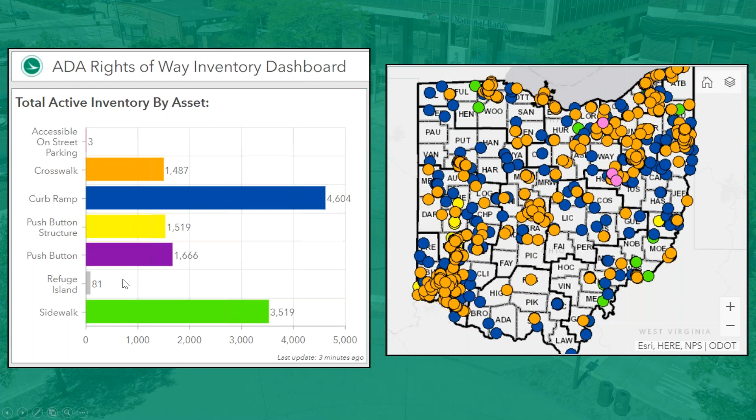The purpose of this webinar is to cover all of those ideas that were implemented in the July update just about a month ago. So the first big update was that we created a single online location for all ODOT ADA guidance, a new website to house references, standards, guidance, and training.

ODOT has ADA guidance spread out through many different manuals, guides, and standard drawings. This effort collects all of those into one page and provides links to where all ODOT guidance on each ADA feature can be found.

If you go to Google and search ODOT ADA, it should be the first page listed in the results. The address is also listed on this slide. The web page contains pull-down tabs for every ADA design feature, including curb ramps. Each of these pull-down tabs contain numerous links to where you can find all ODOT's guidance and standards related to that ADA design feature.

On the right side of the page is a link to a document called ADA Update, What Changed in July, which provides an executive summary of all the recent updates. This webinar will cover each of the 8 points listed in that document, with the first being the new ADA resource website.

The second update involved making some minor changes to the Office of Traffic Operations Signal Design Reference Packet, or SDRP. We added a link to ODOT's ADA Design Resource webpage to page 2, the reference page. We also added ADA checks to the detailed design and review submission stages checklist. And we updated the ADA push button and structure diagram and design notes to remind designers of ADA requirements.

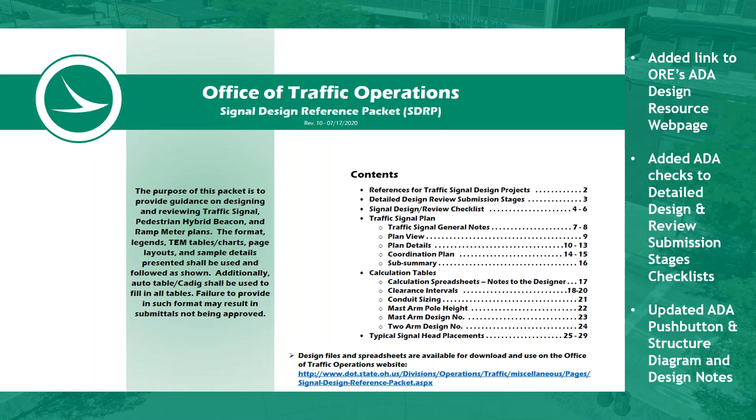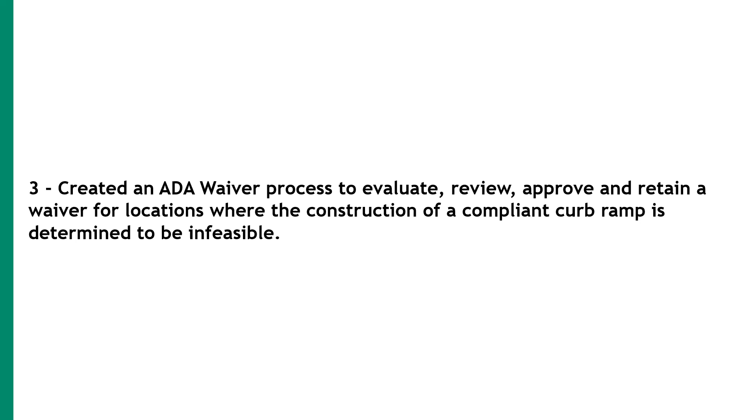Number 3, and maybe the most substantial update, is that we created an ADA waiver process to evaluate, review, approve, and retain a waiver for locations where the construction of an ADA compliant curb ramp is determined to be infeasible. We've broken this update out into 6 subparts, with the first being that we updated the guidance in Location and Design Volume 1, Section 300 to include information on when a waiver is allowed.

Please see L&D Volume 1, Section 306.1.1, Exceptions to PROWAG, for more information. It goes through the next few bullet points. It's not always practicable to fully meet ADA dimensional requirements, which is acknowledged by PROWAG. Even if a curb ramp is eligible for a waiver, it still needs to be constructed to meet ADA requirements to the maximum extent possible. So if one design element can't meet ADA standards, the waiver doesn't allow the designer to forego meeting all the other design requirements.

Disproportionate cost to provide an accessible path of travel can be a factor in a decision to deviate from ADA requirements. Disproportionate cost is defined to be the additional cost of alterations to provide an accessible path of travel to the altered area, disproportionate when it exceeds 20% of the cost of the alteration to the primary function area. That is taken directly from PROWAG and was added to L&D 1, Section 306.1.1.

In cases where it is not practicable to meet all ADA dimensional requirements, the constraints are required to be documented in an ADA waiver form. The district design engineer is responsible for the review and approval or denial of all ADA waivers.

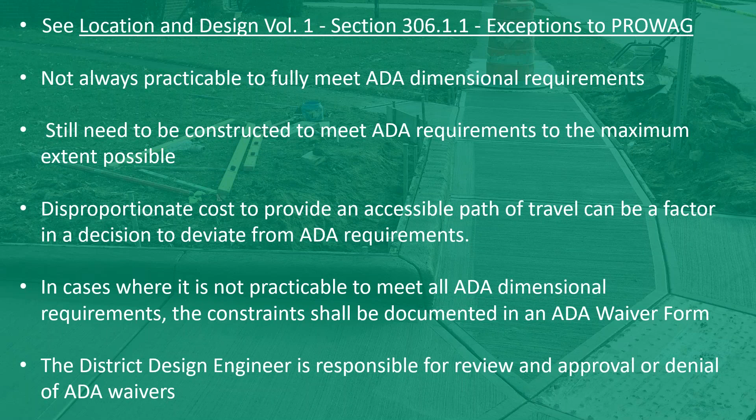A project's scope, purpose and need should be a consideration when evaluating an ADA waiver. The scope of the project can be an important consideration in determining if meeting ADA requirements is practicable. For example, resurfacing projects are considered alteration projects that require the updating of pedestrian curb ramps, and if the scope of a resurfacing project does not require the purchase of additional right-of-way, it is not practicable to purchase right-of-way.

The project should make as many ramps as fully compliant to ADA requirements as possible without the purchase of right-of-way. Those ramps not meeting the ADA requirements must have an approved ADA waiver form completed and signed by the district design engineer.

Future projects at a location with a waiver should determine whether the curb ramp could be made compliant based on the scope of the project, while recognizing that there are some locations where it may never be possible to make the ramps fully compliant. A waiver is a last resort. It's a way to document ODOT's design and construction decisions, not a loophole to provide substandard curb ramp designs.

We created a curb ramp evaluation form to assist planning, design, and construction personnel in evaluating ADA compliance of curb ramps. Here's a screenshot of what the form looks like, and it can be found on the ADA Design Resource webpage under the curb ramp pull down.

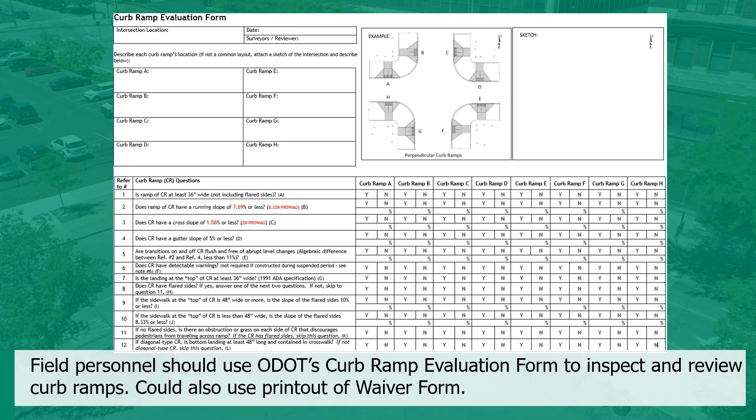Field personnel can use ODOT's curb ramp evaluation form to help inspect and review curb ramps. You could also use a printout of the waiver form to help with inspection and review.

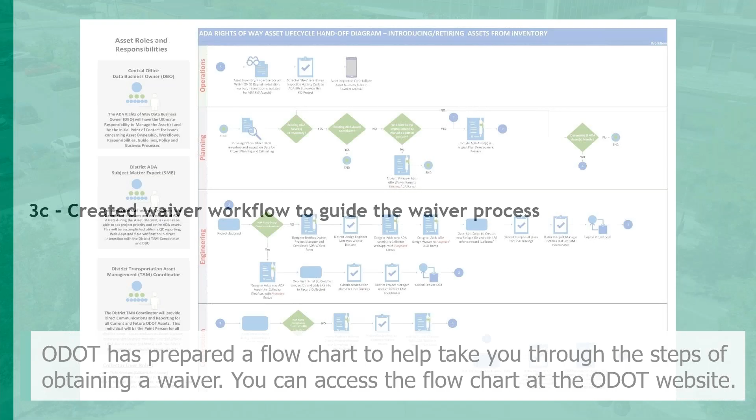Also part of the waiver update, we created a waiver workflow. The workflow provides a step-by-step guide to all users and covers the entire waiver process. It can be found on the ADA Design Resource page in the right-hand column and is titled ADA Lifecycle Handoffs with Waiver.

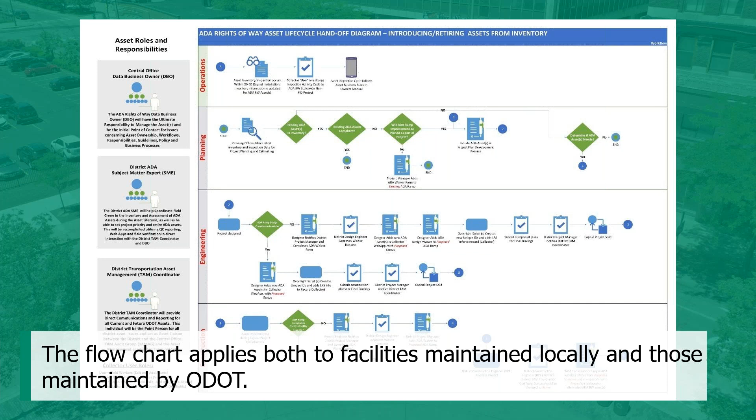The flowchart applies both to facilities maintained locally and those maintained by ODOT. It details the steps required to process an ADA waiver, whether the need is identified during planning, design, or construction.

At any point in the design process, when the designer becomes aware that it is not feasible to make a curb ramp compliant, they should notify the ODOT project manager to start the waiver process. Each ramp that does not meet ADA requirements should have an approved ADA waiver form completed and signed by the district design engineer.

If another project is carried out at the same location, the designer should determine whether the scope of the project will allow making the ramp compliant. ODOT recognizes that it may never be possible to make ramps fully compliant in some locations.

So here's the process for obtaining a waiver while in the design phase. The designer notifies the ODOT project manager. The ODOT project manager completes the ADA waiver form. The district design engineer reviews and approves the waiver request and notifies the ODOT project manager. The ODOT project manager adds the new ADA asset into the collector app with the status of proposed.

The project manager adds the ADA design waiver to the proposed ramp, and then the overnight script creates a new unique ID for the ramp and adds LRS info to the record in the collector app, and then the designer submits and completes final plans for the final tracings.

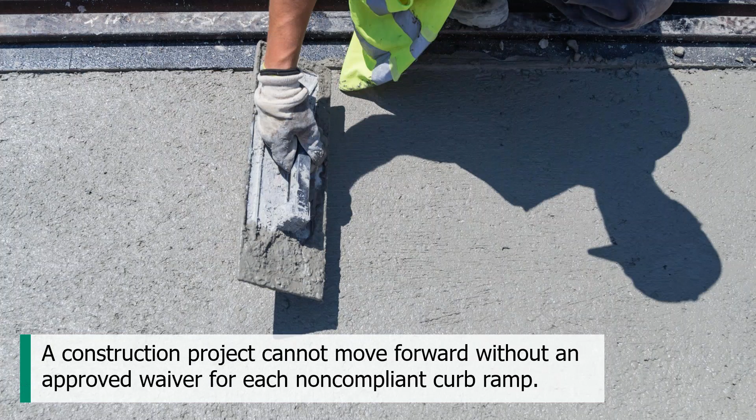A construction project cannot move forward without an approved waiver for each non-compliant curb ramp. Waivers approved during the design phase should be listed in the general notes and on the title sheet of the plans.

So here's the process for obtaining a waiver during the construction phase. The contractor notifies the ODOT project engineer of a non-compliant curb ramp. The ODOT project engineer notifies the district project manager who completes the ADA waiver form. The district design engineer reviews and approves the waiver request. The district project manager adds the waiver to the ramp in the collector app.

When the project is completed, the district TAM coordinator changes the ramp's asset status from proposed to active. And finally, the district TAM coordinator changes the status of any assets replaced or eliminated to retired.

Again, this is just a sample workflow, and the districts can assign the different responsibilities as they see fit outside of the waiver approval, which again can only be made by the design engineer.

The fourth subpart of the waiver process update is the creation of the waiver form itself, which is set up in FormStack. Currently access is restricted to only the district design engineers, but it can be opened up to a few other users per district, though it's not intended to be something everyone has access to the electronic version of anyway.

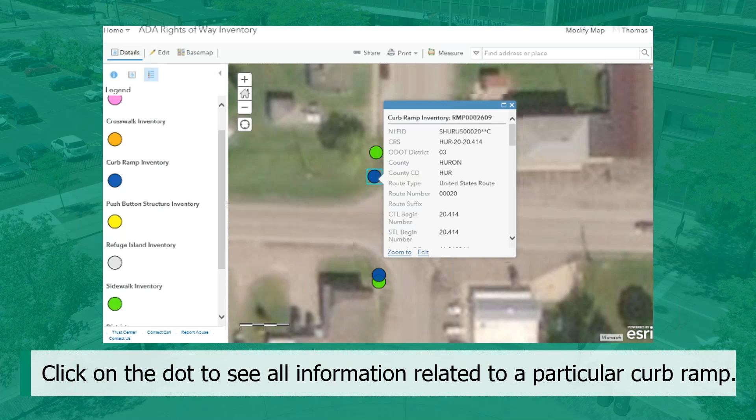The sixth and last subpart of the waiver process update included updating the construction plan title sheet to include a note on whether or not there are any curb ramps that have waivers within the project. If so, a general note should be added to describe the curb ramp and waiver in more detail.

In L&D Volume 3, Section 1302.15, this section shows the formatting that should be used when noting whether or not there are any ADA design waivers on the project, and includes references on where the updated sample title sheet and sample plan note can be found.

On sample plan sheet 1302.1, you can see here highlighted in red what it looks like just below the design designation and design exception information. As shown on the previous slide, it should just say required or not required, and the general notes can add more detail.

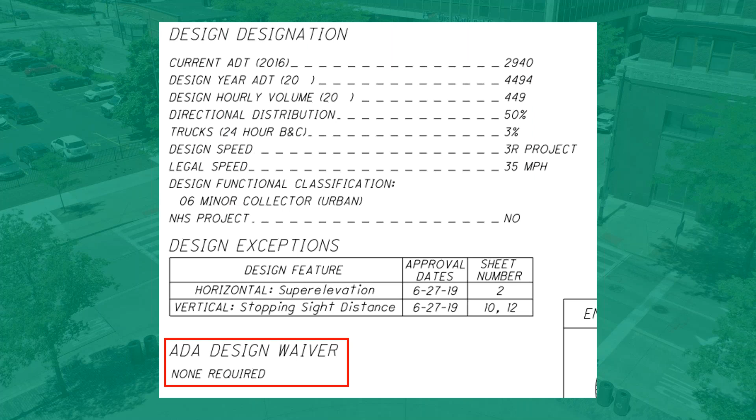In L&D Volume 1, Appendix B, Roadway Sample Plan Notes, you can find Sample Plan Note R128, ADA Waiver, which lists the ramp ID number, the approval date of the waiver, and which sheets the ramps are located on.

Update number 4 included updating Section 300 of L&D Volume 1 to provide additional design guidance for optimum curb ramp selection. Curb ramps were divided into tiers with preferences listed.

Curb ramps come in 5 basic types. Tier 1 is considered to be the most desirable, and Tier 4 the least desirable, with the blended transition as an additional design option.

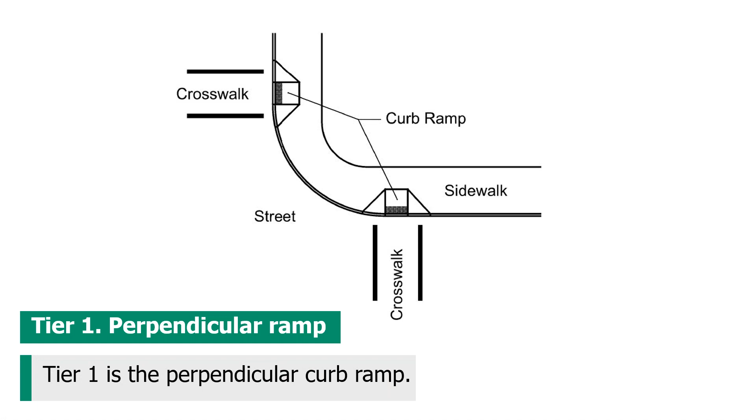Tier 1 is the perpendicular curb ramp shown here. This is generally the best design for pedestrians, provided that a landing of at least 4 foot wide is available for each approach.

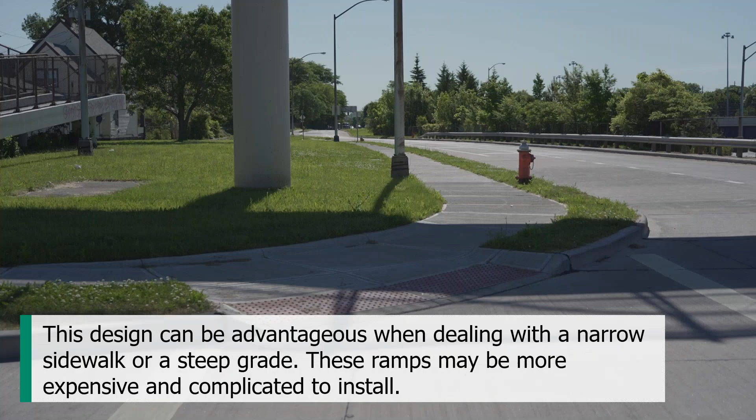Tier 2 is a combined ramp, which is basically 2 ramps in one. This design can be advantageous when dealing with a narrow sidewalk or steep grade, but these may be more expensive and complicated to install.

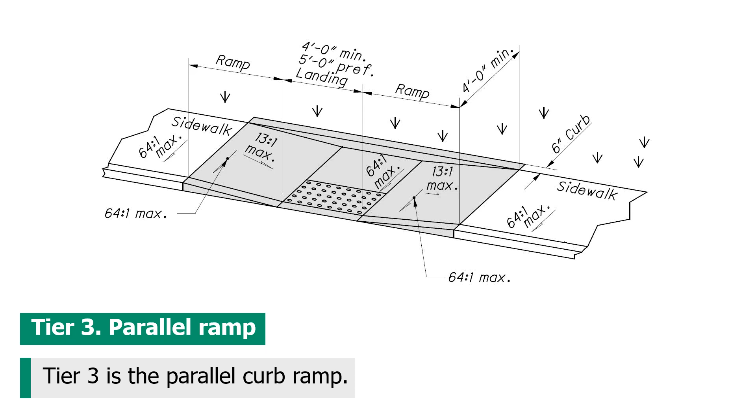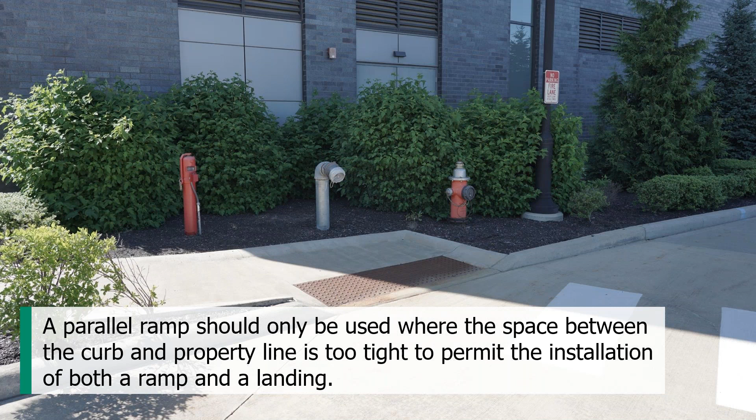Tier 3 is the parallel curb ramp. A parallel ramp should only be used where the space between the curb and property line is too tight to permit the installation of both a ramp and a landing. A parallel ramp may be necessary on steep terrain or in locations with high curbs.

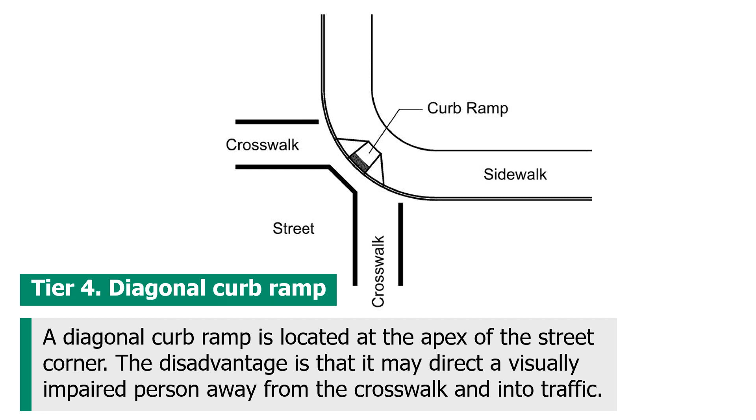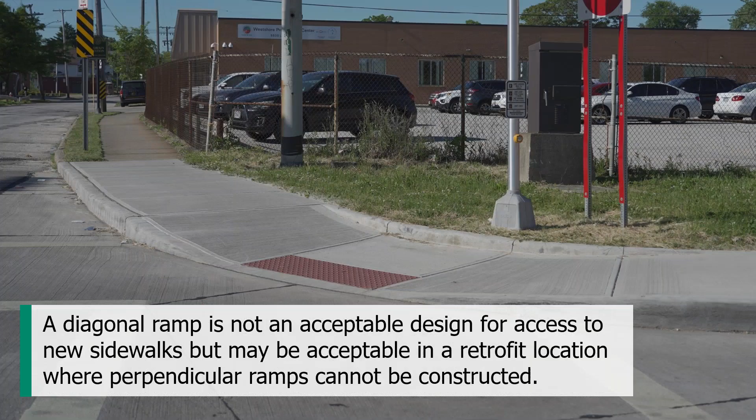Tier 4 is the diagonal curb ramp. A diagonal curb ramp is located at the apex of the street corner. The disadvantage is that it may direct a visually impaired person away from the crosswalk and into traffic. A diagonal ramp may not be used if the radius is less than 20 feet, and it is not an acceptable design for access to new sidewalks, but may be acceptable in retrofit locations where perpendicular ramps cannot be constructed.

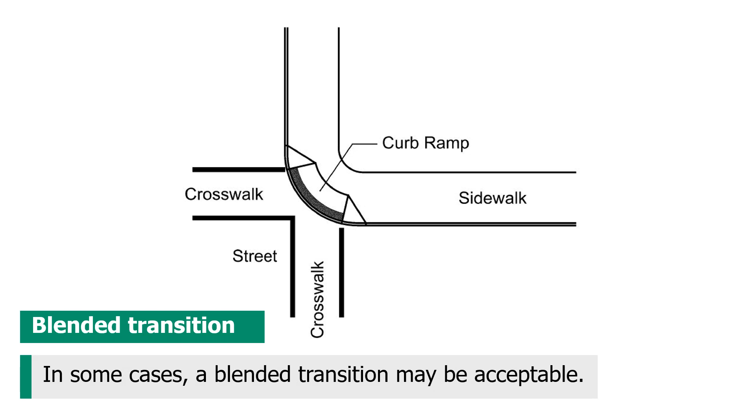And lastly are blended transitions. Blended transitions are useful when the right-of-way at the radius area is very limited and a single landing area at the bottom is the most feasible option.

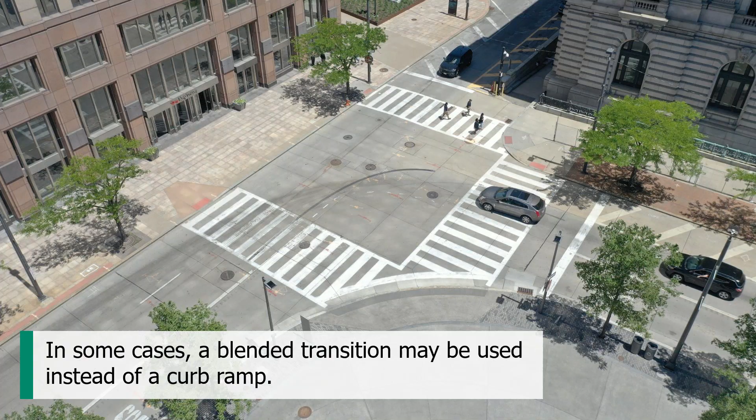Update number 5 includes no longer solely relying on referring to standard construction drawings, and requiring, at minimum, a plan view of curb ramp layouts in construction plans. An example plan sheet is available on the ADA Design Resource webpage under the Curb Ramp pull-down tab.

Curb ramp updates are mostly made in resurfacing type projects, so designers typically have a low level of survey data. The data may come from LiDAR or just by gathering field measurements with a smart level.

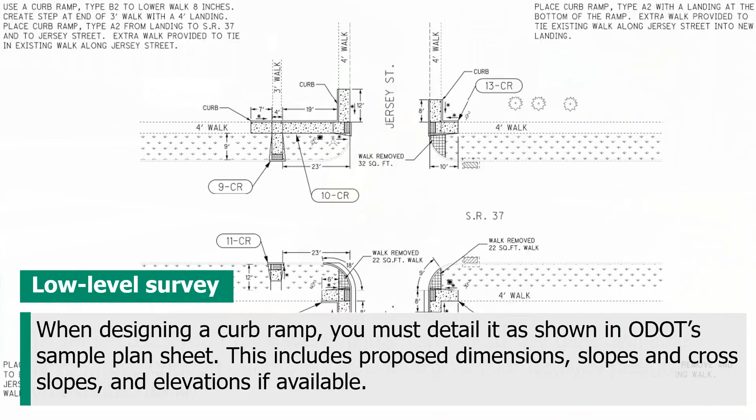When designing a curb ramp, you must detail it as shown in ODOT's sample plan sheet, and this includes proposed dimensions, slopes, and cross slopes, and elevations if available. On projects where you do have a higher level of survey data available, you should add elevation information as well.

Update number 6 involved adding a tolerance or buffer to a few of the design standards to account for slight inaccuracies in either design or construction. Meeting ADA standards is black and white - you either meet or you don't. So rather than designing everything to the absolute minimum or maximum, we've made ODOT's ramp cross slope and ramp slope design requirements slightly more conservative than PROWAG standards.

The slope values for cross slope changed from a maximum of 2% to 1.56%, or from 50 to 1 to 64 to 1. And ramp slope or grade changed from a maximum of 8.33% to 7.69%, or from 12 to 1 to 13 to 1.

We also updated the sidewalk slope to match, so there isn't a lip created between the sidewalk and curb ramp area. And very important here, if PROWAG standards are met, a waiver is not required, even if ODOT standards are not met.

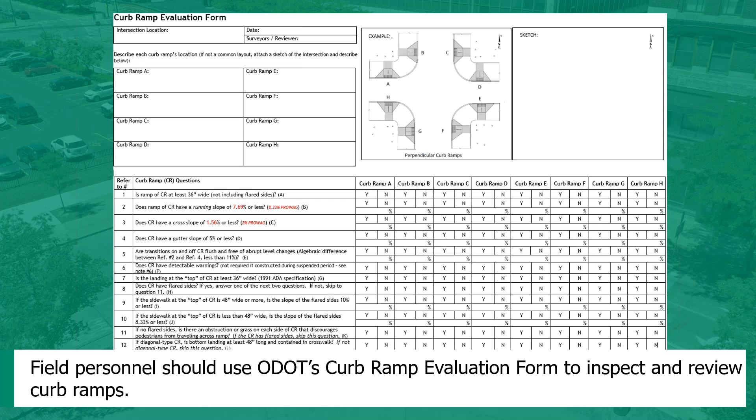Update number 8 included creating 4 ADA curb ramp training videos, which can be found under the Training pull-down tab on the ADA Design Resource website. The videos cover all the updates ODOT has made regarding ADA curb ramp design, including individual videos specific to design, the waiver process, and construction inspection. Many of the slides in this presentation came from those videos, but the videos do provide more detail.

So in summary, we've made these updates to try to improve ODOT's adherence to ADA curb ramp standards. They may not be enough, or it may be overkill, but we will adapt based on feedback we get from planning, design, and construction in the districts, as well as central office and locals. So feel free to reach out, let us know how it's going, any issues or gaps in the guidance that we can fill in. It may not be perfect, but we think it should get us headed in the right direction.

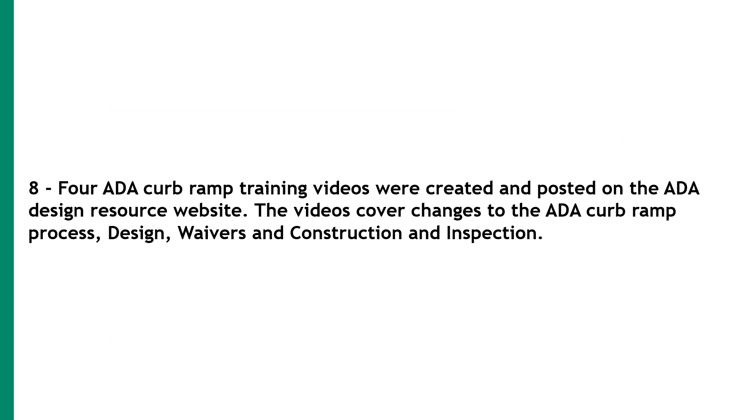Brenton, there's about 10 more questions I've sent over to Don while he was speaking. One person asked if you could please go over the slope changes again, so maybe go back over those while Don reads through the additional questions.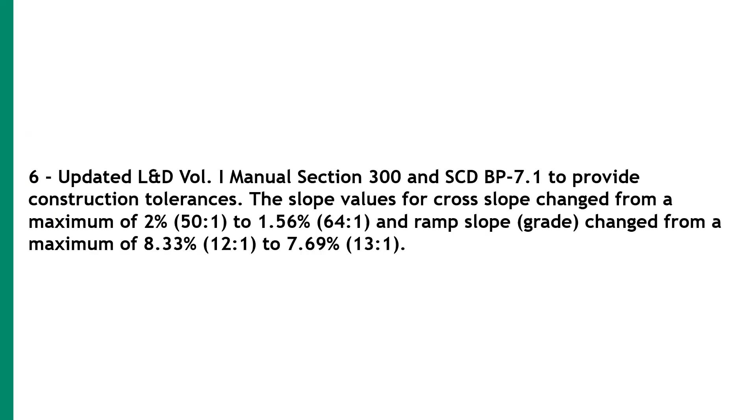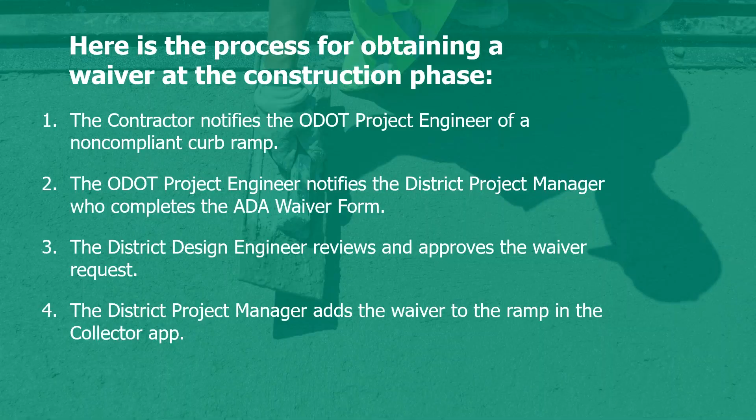Dawn, do you want me to start reading some of these questions off and you guys can address them? Sure, but there's one in here about right of way that I wanted to address. Whether lack of right of way is a reason for a waiver - it is a reason for a waiver if, say, you have a resurfacing project and we're not purchasing right of way on that project, but this ramp would require right of way. Then that would be a reason for a waiver. Now, at some point in the future, if you have a project that is purchasing right of way, or you could work it into the scope of another project, we would hope you could go back and address that ramp. There's language in the L&D Volume 1, Section 300, that goes over when a waiver would be appropriate in more depth. As I mentioned, the scope, purpose and need of a project can factor into that, so I did want to add that.

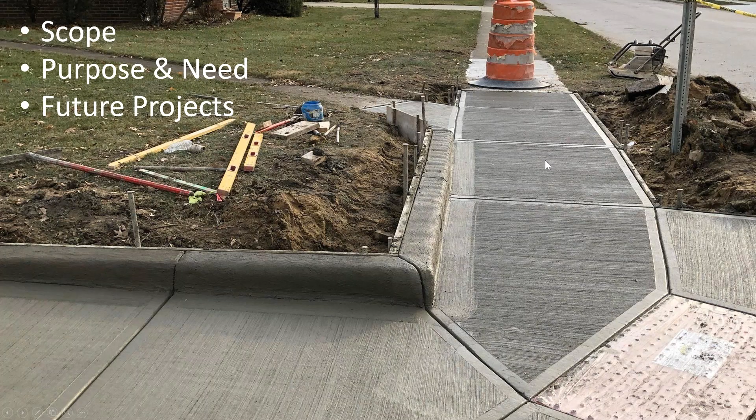Okay, I'm just going to start at the top and run down. If it's something you've already answered, just tell me to go on to the next one. Are there specific notes to be used for curb ramps approved by waiver? The title sheet should denote that there's a waiver on the project, and within the general notes of the construction plans, it should provide details on a ramp that doesn't meet compliance. So we don't have any specific notes other than what Brent has shown.

Yes, okay. That's why I was trying to hold the questions till the end, because some of these topics overlapped - I mentioned them earlier and then covered them in more detail later. So hopefully that question was answered once I got to this section of the presentation.

Existing sidewalks where the maximum ramp slope is not feasible due to site constraints, for example utility poles or vaults, right-of-way limits may be reduced as follows: 10:1 for a maximum rise of 6 inches, and 8:1 for a maximum rise of 3 inches. That's in the standard construction drawing also - because of those conditions, it gives a couple different slopes that you can use for short periods of time.

Okay, if a project is at stage 3, does the sidewalk and curb ramp design have to change to the new standards?

I'm not sure the official language, but basically we implemented this guidance July 17th, and said if you can fit it into a project that's already in the design phase, please do so to the maximum extent possible. But it's required for any project scoped and starting design after July 17th. So if you're at stage 3, try to comply. ADA is still the law, it's just you won't have to follow these updates for waiver forms and that kind of thing. But try to design to the maximum extent possible, and all new projects from July 17th forward should be following these guidelines.

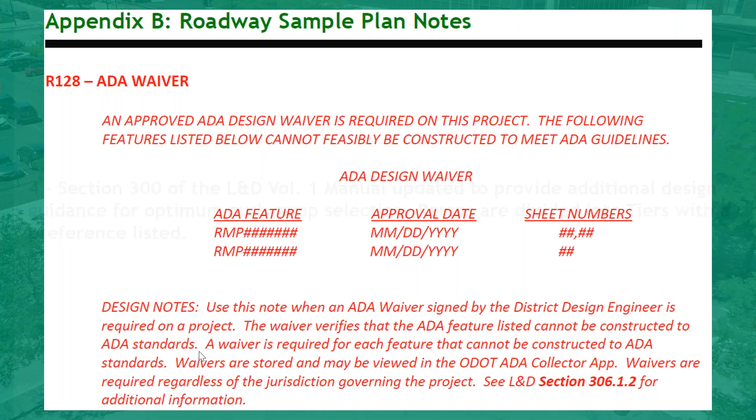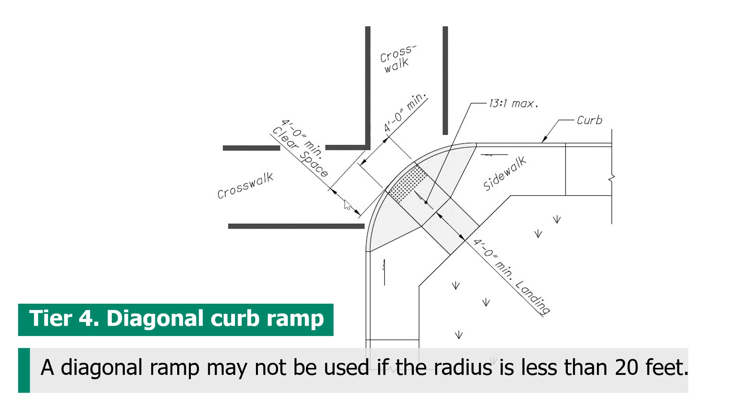Okay, next question: you measure the width of the ramp for the collector. Why isn't the length of the ramp to the landing measured? I'm not familiar with what all is collected in the collector app as far as the measurements. Don, do you know if the length is? Usually we're primarily concerned with the slopes, so in general we haven't been adding that length of the ramp, mostly focused on getting that slope correct. And that's right, we have not been collecting that information on the length of the landing or the ramp itself.

Next question: will we need a waiver for tying into existing non-compliant sidewalk cross slopes outside of the ramps?

That's a good question. I would lean towards no. If the area of the curb ramp is meeting ADA standards, and you fix so many feet of sidewalk to tie into, then transition into a non-compliant sidewalk slope, I would think you wouldn't need a waiver for the curb ramp. Don, do you agree? The waiver process is really for a curb ramp. If you start adding the sidewalk part of it too, how far are you going to chase it? So for this app and this update, we're really just concerned with the curb ramps themselves.

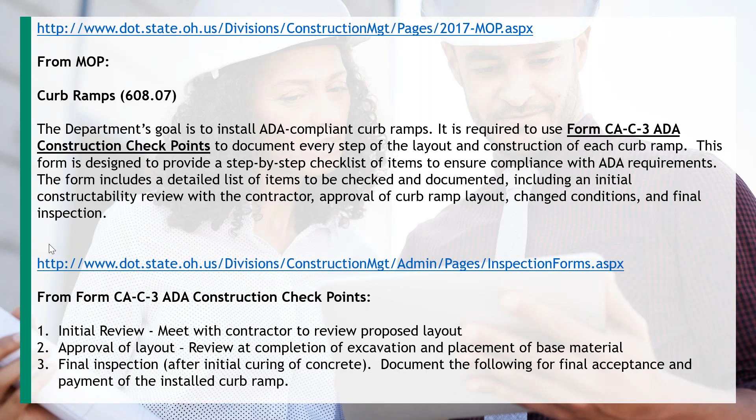Okay, next question. What is the minimum cross slope for a ramp or landing area? What is the minimum longitudinal slope for a ramp? If you go below 5%, is it no longer a ramp, correct?

If you go below 5%, then you've kind of created a blended transition, which is also a good asset to have out there. You don't need a landing with a blended transition, so there are a lot of advantages that go with that.